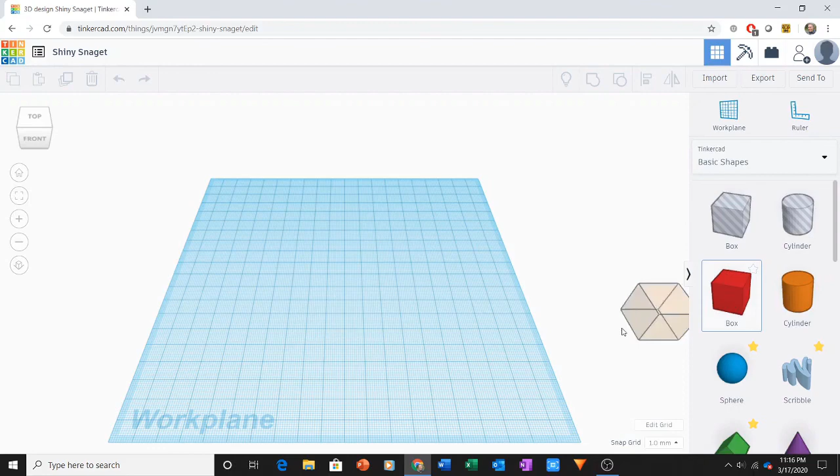At that point, you'll see what's called the work plane on your screen. So the Lego brick is a great project to work on because it utilizes a lot of the basic functions of Tinkercad. Once you understand these functions, you can go on and work on a lot of your own creative designs. So the first thing you're going to want to do is click on a box and drag it onto your build plane.

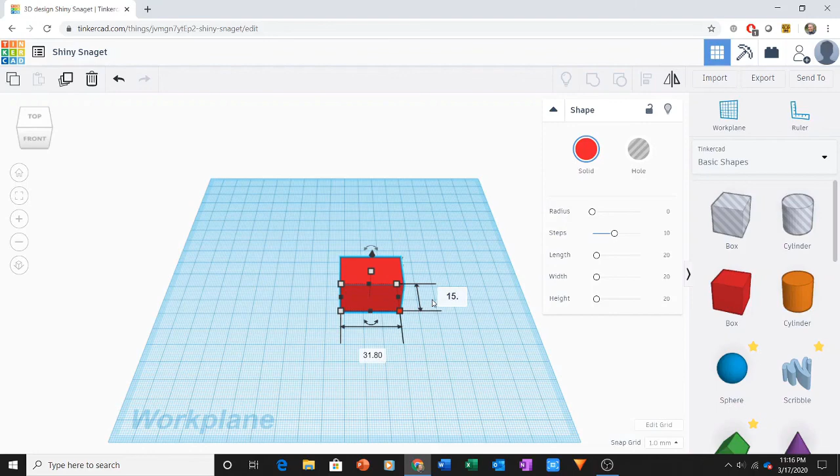You can resize the box multiple ways. You can do it manually, or by typing in the numbers, which is what I prefer to do. So I'll click on here and change the dimensions to 31.8, then click over here where it says 20 and change that to 15.8, and I'm going to make the height.

To get to the height, I need to grab that third dot up there. So if I rotate my view and look right at my shape, you can see the height better. I click over here and change it from 20 to 9.6. Now, if you're curious about the unit we're working in, it says millimeters. So when I'm saying 31.8, it's actually 31.8 millimeters, and 9.6 millimeters is the height.

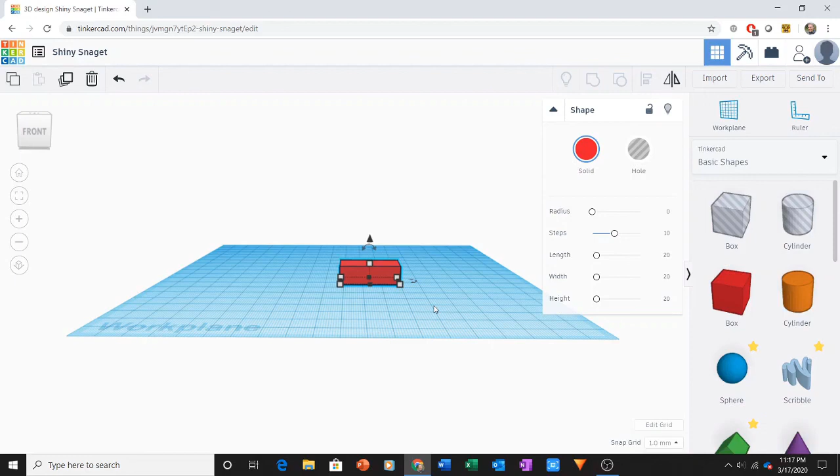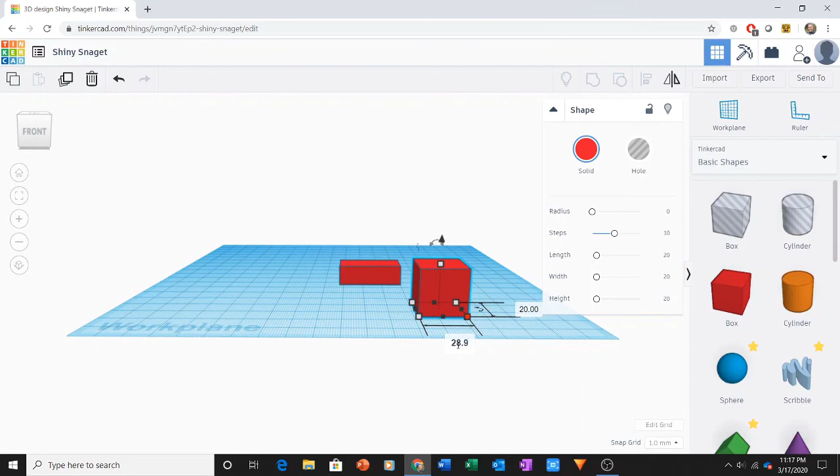So now we have our box. I'm going to drag another box onto the work plane and resize this one. This is going to be 28.9 by 12.9. I'll just move it over here so you can see.

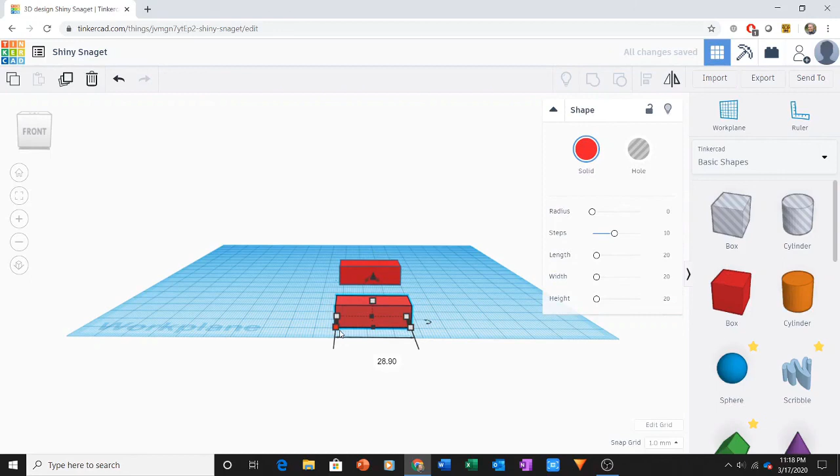So it got switched up a little bit. 28.9, 12.9, and a height of 8.6. Oh, not 8.8, 8.6, there we go. Let me double check the dimensions: 28.9, good. And I'll rotate my view here so I can see the side. Check that: 12.9, good. And then my height, 8.6.

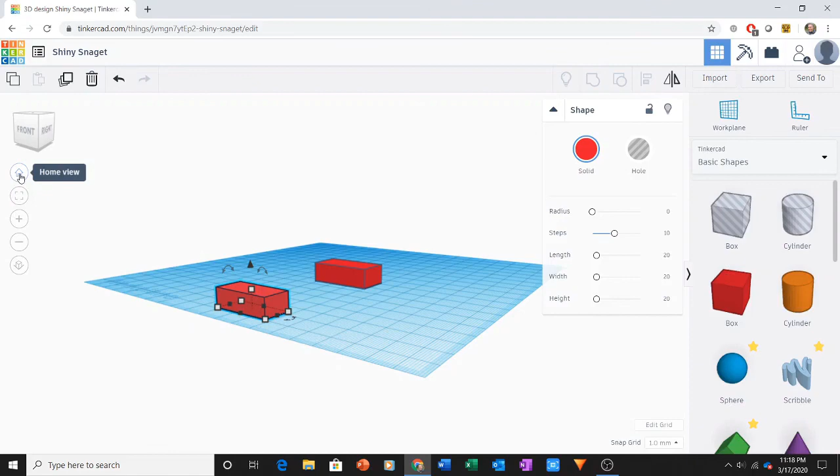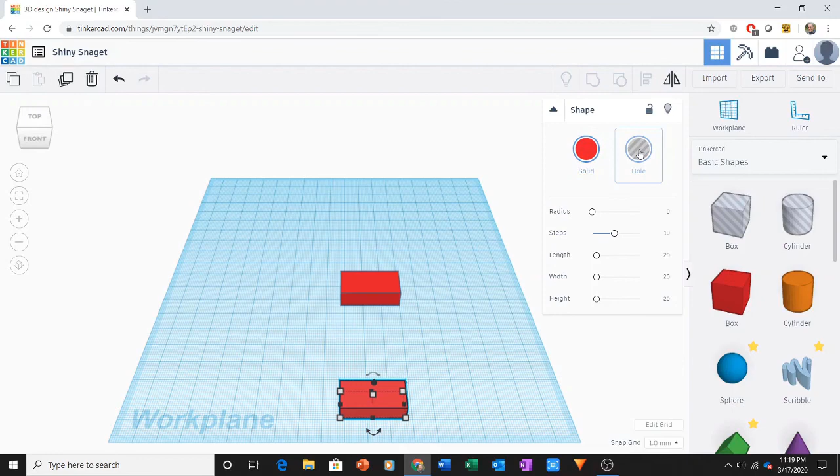Now if you follow my mouse over here, I'm going to this little house in the left corner, the home view. I manipulated my view using the right mouse button, switching the way I'm looking at the work plane. I can click on home view and I'm back to the original view. You can also see I have the smaller rectangle selected. When you look up here, it says Solid and Hole. I'm going to click on Hole, and when I do, the box becomes transparent. You can do that for any shape you work with from the toolbar.

The next thing I'm going to do is hold down the left mouse button and drag this red dotted box over both of my shapes. Now you'll see it says Shapes 2 in this corner where my mouse is, which identifies that I have both shapes selected.

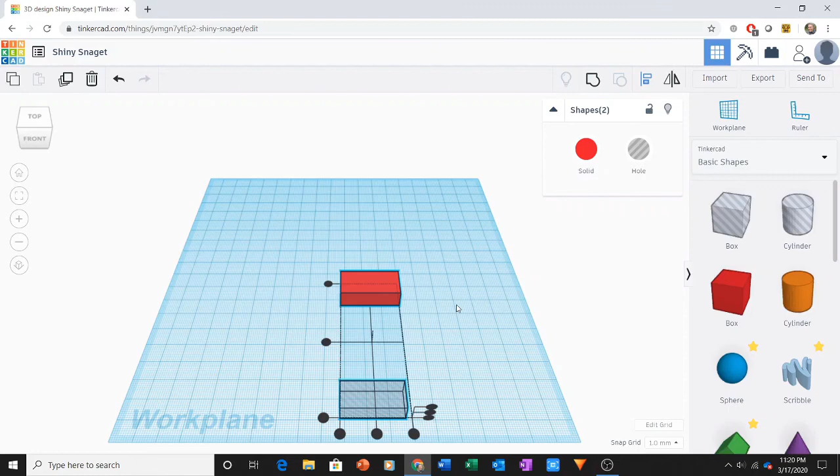Now if you follow the mouse, you'll see I'm hovering over the Align tool. I'll click on the Align tool, and it shows me 9 dots. In 3D design, we're working with 3 dimensions, so I can align along the y-axis, the x-axis, and the z-axis, which is for our height. Here we're going to worry about the x-axis and the y-axis. So I'm going to click on this middle dot, and then I'm going to click on this middle dot.

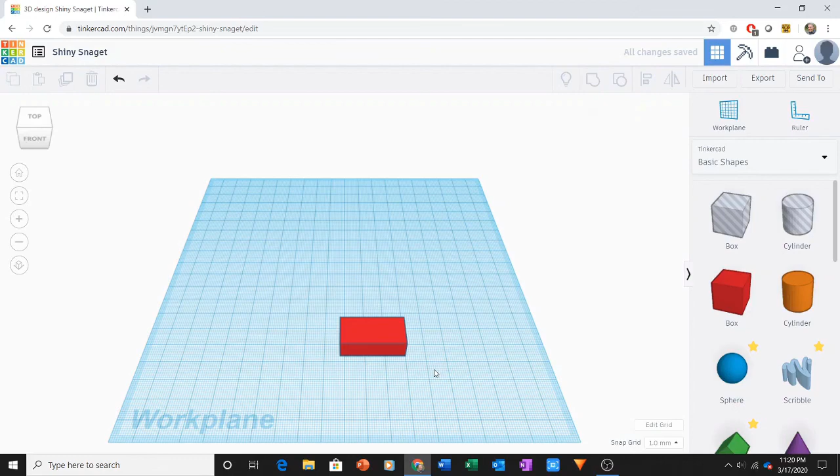The next thing I need to do is go up over here to this little icon that looks like a circle with a square or triangle coming out of it. I click on that, and that groups the two shapes into one. I can use my right mouse button to take a look underneath and see that the hole was cut out from the larger rectangle. So this gives me the first component of my Lego brick.

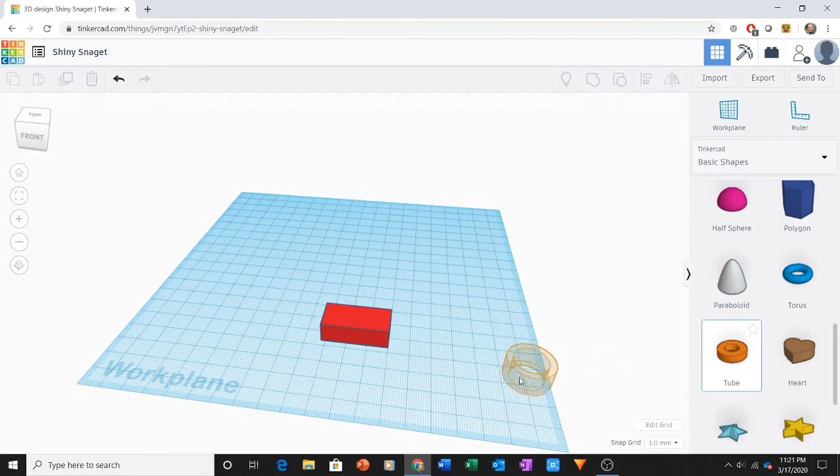The next thing I'm going to do is come over here to where it says Basic Shapes. I'll scroll down until I find the tube, drag the tube onto the work plane, and resize this as well.

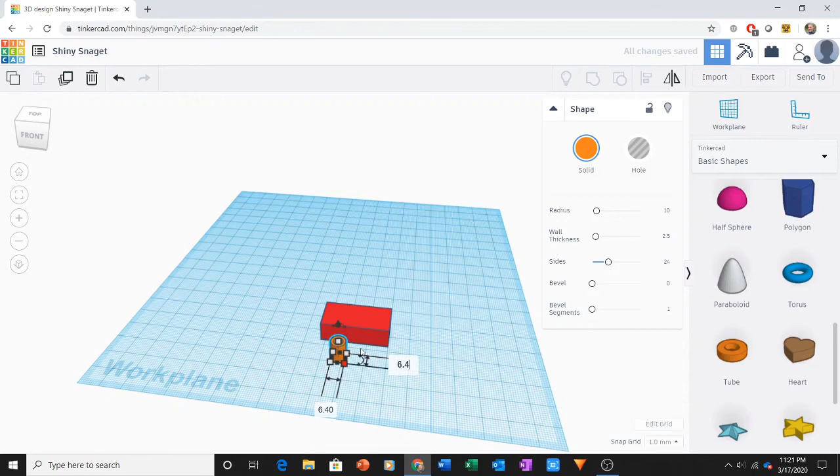The tube is going to be 6.4 by 6.4 millimeters, with a height of 8.6 millimeters.

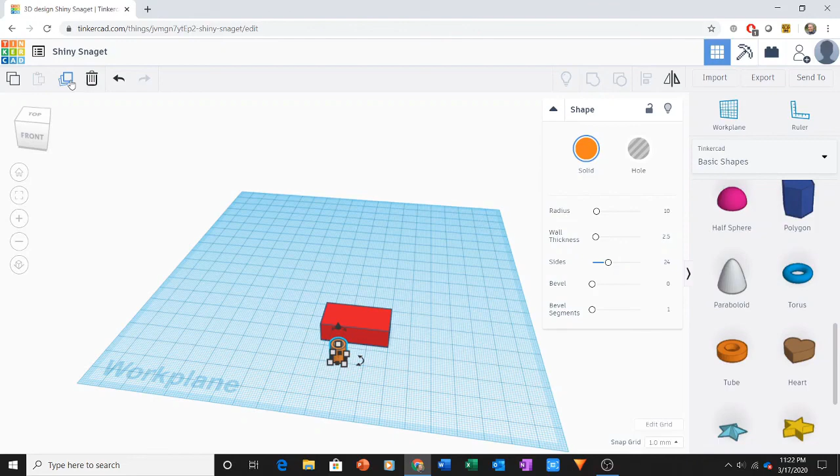I'm going to make sure my tube shape is selected. I'll go up to the left-hand corner of the screen and click Duplicate. When I click Duplicate, you see the shape blink, but you don't see a second shape because they're stacked on top of each other. I need to move that shape over 8 millimeters, so I'll use the right arrow key on the keyboard: 1, 2, 3, 4, 5, 6, 7, 8.

Then I'm going to hit Duplicate again, and this time it should move it for me automatically. Let's see if it does it. Yeah, all right, so these tubes are each an individual shape.

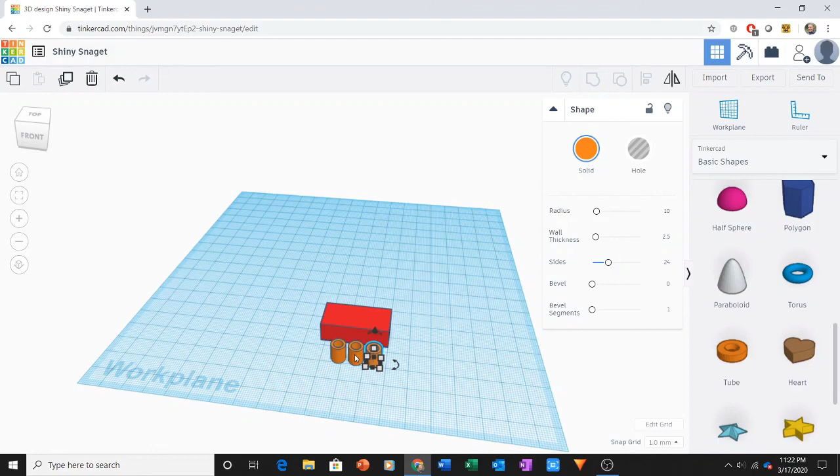I'm going to put a box around them, and it shows shapes 3. I'm going to group that so they become one shape. Now you see 3 tubes, but I can move it as one shape.

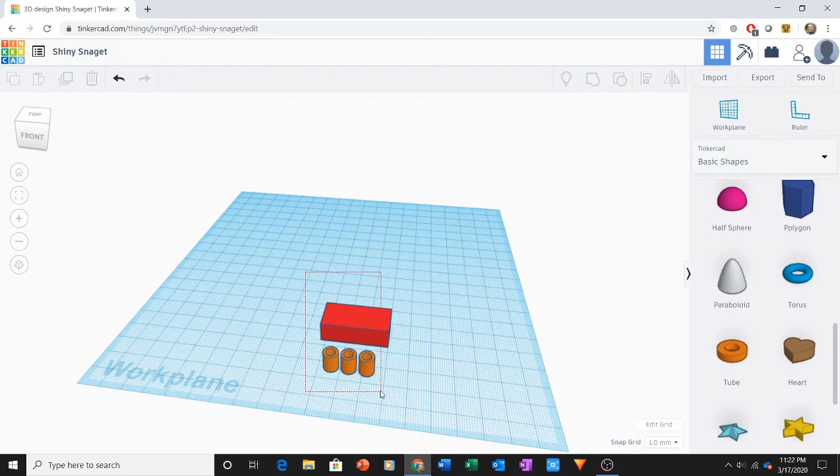Then I'm going to left click and drag this box around the rectangle and the tubes, and you'll see that it says shapes 2. So even though you see shapes 4, the 3 tubes are being read as one shape.

I'm going to click on Align, and I'll center again along the y-axis and the x-axis, and then group them. That's this button up here, the circle with the square and triangle coming out of it.

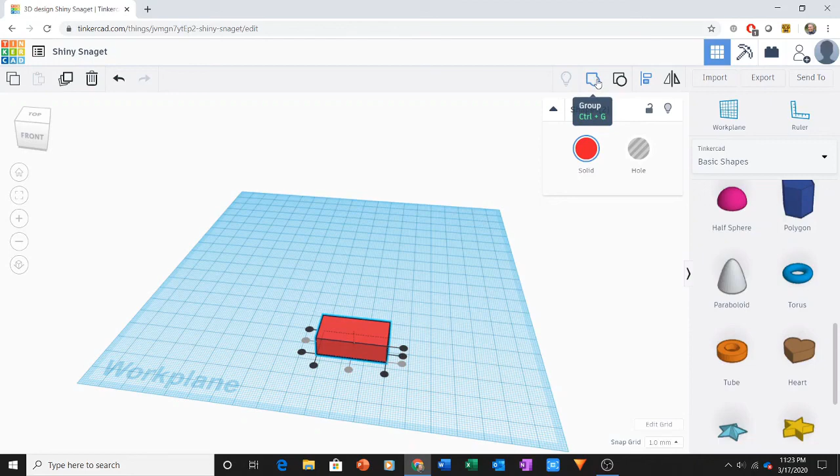I use my right mouse button to rotate my view, and you can see the beginning of a Lego coming together. Now I want to get back to the original view, so I go over to the little home view button, click it, and I'm back to the home view.

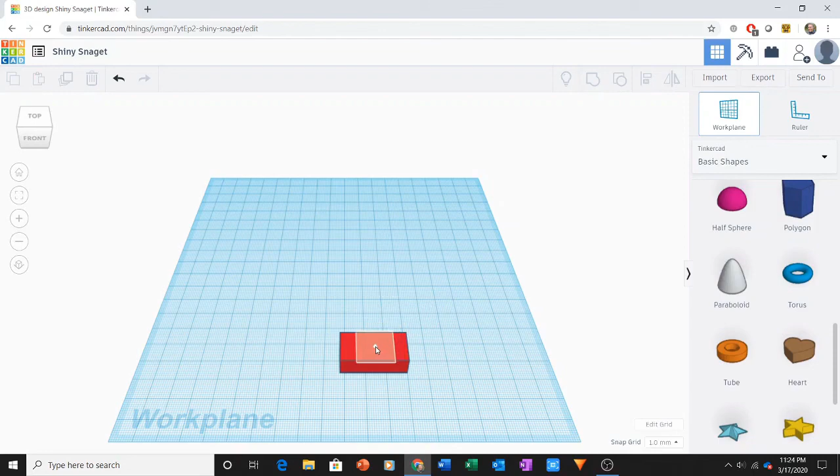Now the next thing I'm going to do is go over to the right side of my screen. I'll click on Workplane, drag it, and drop it right on top of the rectangle, or the brick at this point. My screen turns orange, which means I'm working right on top of that Lego brick that we've started.

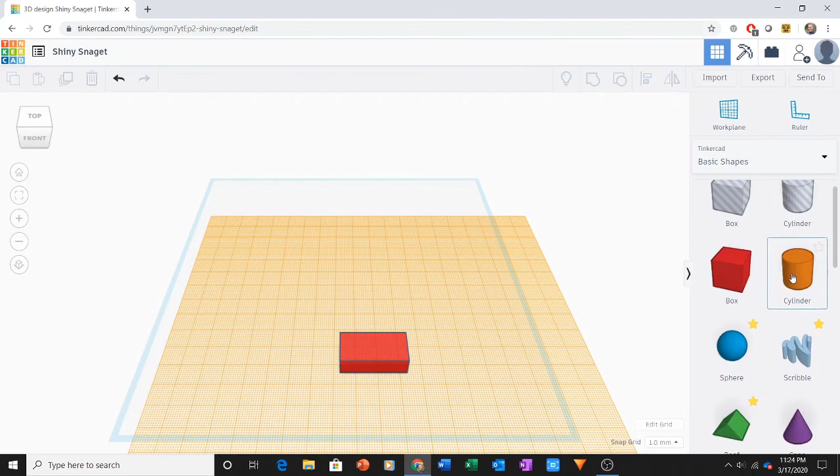So the last thing the Lego brick needs are studs. We're going to use cylinders to create those. Go ahead and click the cylinder, drag it onto the work plane, and I'm just going to move it so you can see the whole thing.

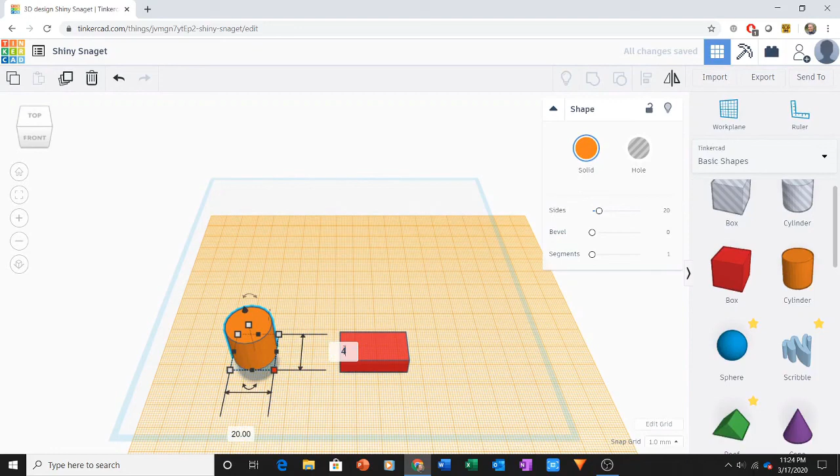Going to change the dimensions to 4.84 millimeters by 4.84 millimeters, and the height is going to be 1.8 millimeters. So that gives us our first stud.

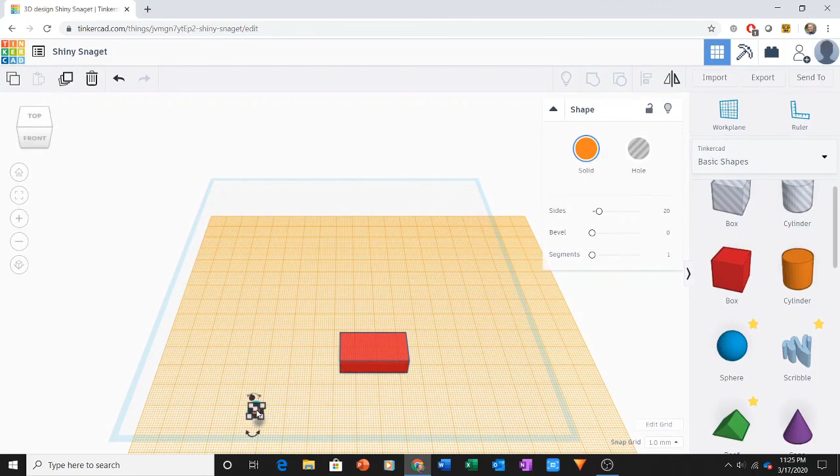Altogether, we're going to need 8 of these for this brick. There are a couple ways to do this. First, I know that I'm clicked on it - all those other numbers were just showing me how far I moved it, and I don't need to see them, so I deselected and reselected it.

I go back up to the upper left corner, hit Duplicate, and then I'm going to hit the right arrow 8 times: 1, 2, 3, 4, 5, 6, 7, 8.

Now I'm going to put a box around these - I have 2 shapes, so I'm going to group them. Now when I duplicate those 2 shapes, I'll have 4. I'm going to hit to the right 8 times: 1, 2, 3, 4, 5, 6, 7, 8.

I'm going to put a box around these, showing shapes 2 because I had already grouped part of it. I'm going to group this, so you're looking at 4 studs there, but it's only showing as one shape.

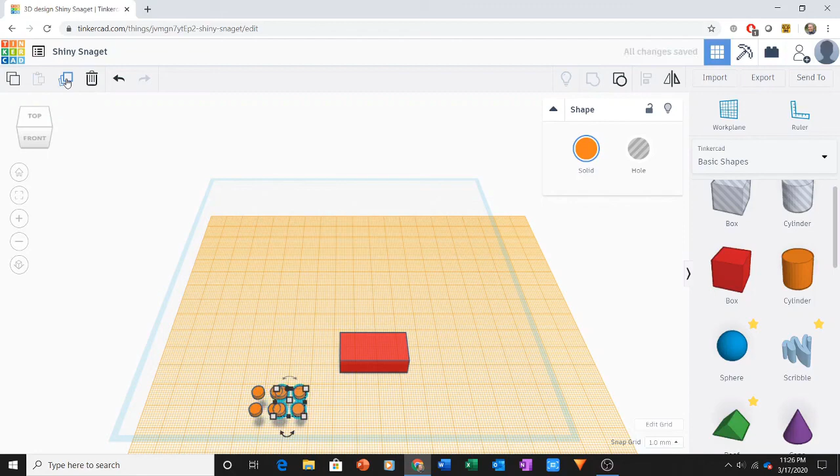When I duplicate this, it's actually going to give me 8 studs in total, and I'm going to want to move this 16 millimeters: 1, 2, 3, 4, 5, 6, 7, 8, 9, 10, 11, 12, 13, 14, 15, 16.

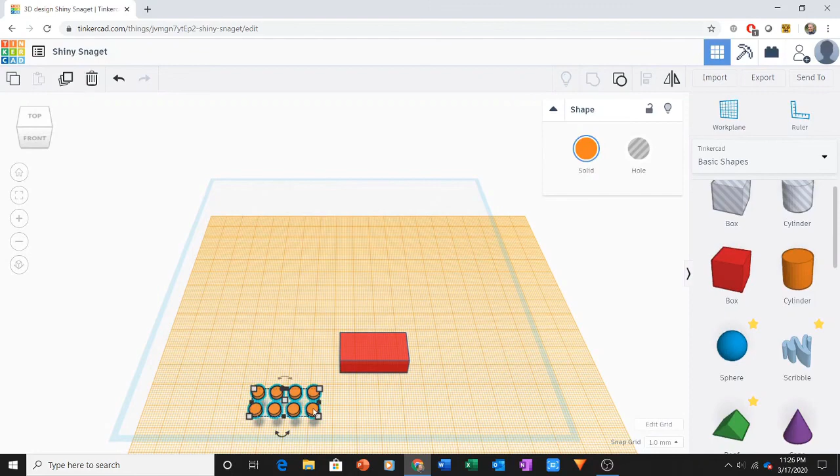I'll drag a box over all of the studs and group them, so now all 8 of these will move as one shape. Then I'm going to drag a box over the studs in the brick. So even though you see 8 studs in one brick, it does not say shapes 9, it says shapes 2, because the studs have all been grouped into one shape.

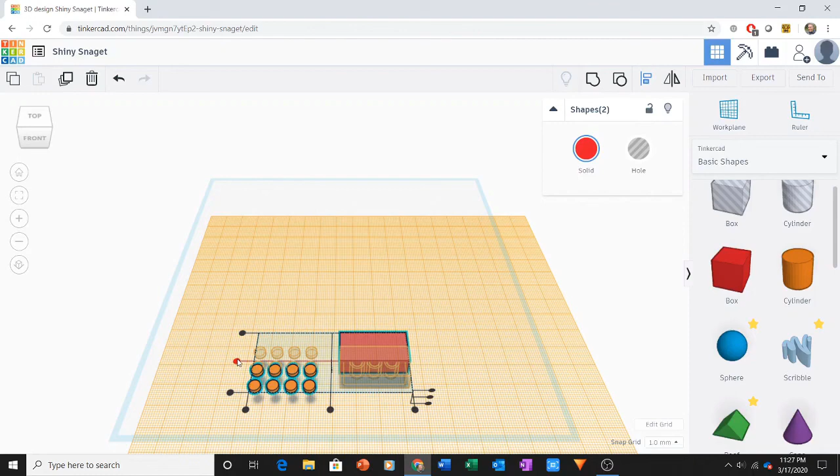I'm going to go back and click on the Align feature. I'll align on the y-axis, then on the x-axis, and go ahead and group this.

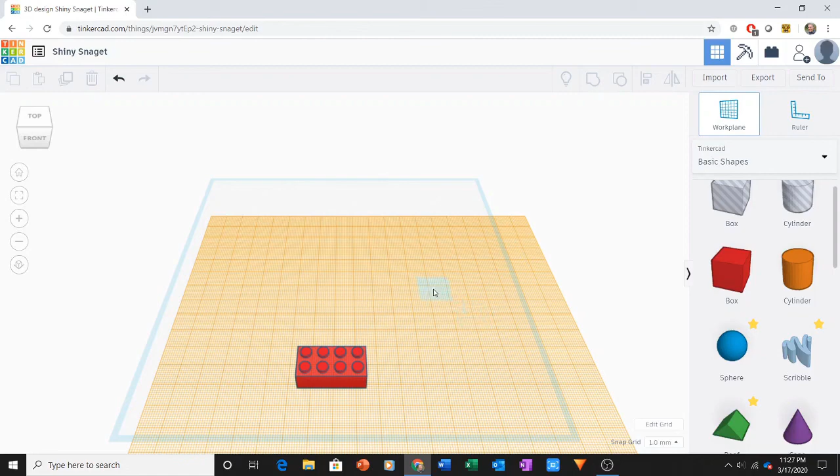Before I take a look at it and inspect it, I'm going to go back to the right side of my screen, click on Workplane, and drag it anywhere except on top of my shape. The screen is back to blue. Can take a look at this, and I have a completed Lego brick.